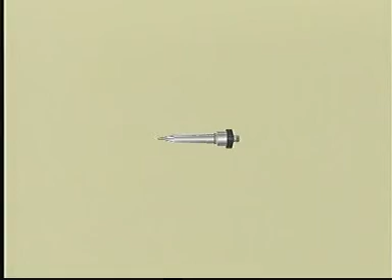Overhaul of fuel valves on 70, 80 and 90 MC engines. See Instruction Book, Volume 2, Procedure numbers 901 and 909.

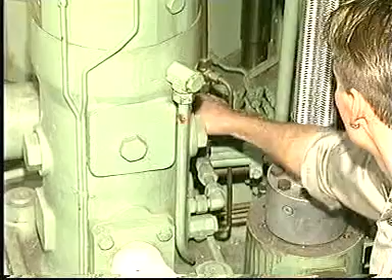Before any dismantling, drain the fuel oil from the fuel oil high pressure pipes. Using a hook spanner, loosen the union nut. Using a spanner, loosen the coupling pieces fitted on each end of the high pressure pipe.

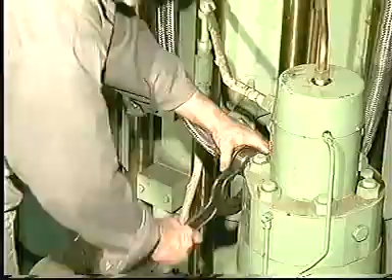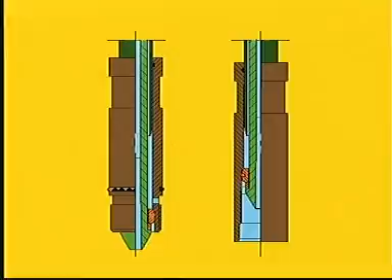The fuel oil high pressure pipes may also be of the double pipe design. See Instruction Book, Procedure numbers 901 and 909. Remove the high pressure pipe, taking care not to damage the high pressure pipe seatings. Disconnect the return oil pipe from the fuel valve.

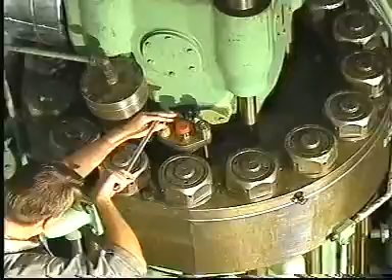Mount protective plastic plugs in or on all high pressure seatings. Unscrew the retaining nuts and remove the spring housings. Remove the fuel valve from the cylinder cover using the lifting tool if the valve sticks.

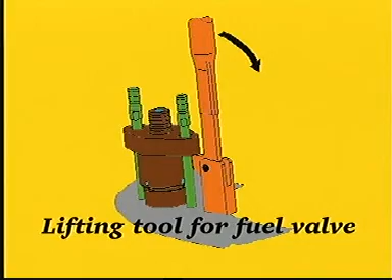Thoroughly clean the fuel valve bore in the cylinder cover. Clean off any carbon deposits in the fuel valve bore with a carbon cutter.

If marks are found on the seating in the bore, recondition the seating with a seating face cutter. Finally, grind the seating with a grinding mandrel and a grinding compound, for example carborundum number 200.

After milling and grinding, thoroughly clean the bore and seating and check again that there are no signs of damage on the seating.

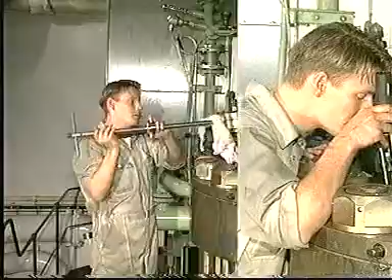After reconditioning the seating in the bore and thoroughly cleaning both bore and seating, fit new O-rings on a new or overhauled fuel valve which has just been pressure tested and lubricate with molybdenum disulfide. Carefully mount the valve in the cylinder cover.

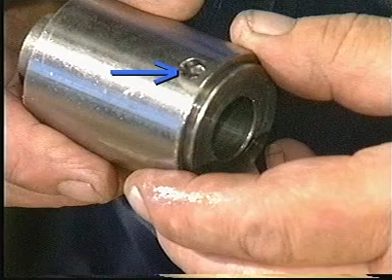To ensure that over-tightening has not taken place, check that the locking and indicating pins have not been bent or broken off.

In the event of over-tightening, mount a new spring housing. We recommend that the calibration of new and especially old spring housings be checked before they are mounted on the engine or on the fuel valve test rig.

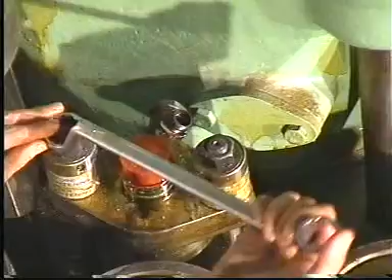Mount the spring housings and retaining nuts. Tighten the nuts until the top face of the pressure disc is flush with the top face of the spring housing.

Reconnect the return oil pipe to the fuel valve.

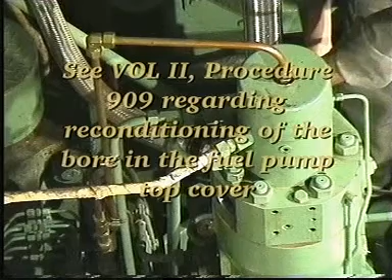Check that there are no marks on the seating surfaces of the fuel oil high pressure pipe. If necessary, recondition the seatings as described in procedure number 909.

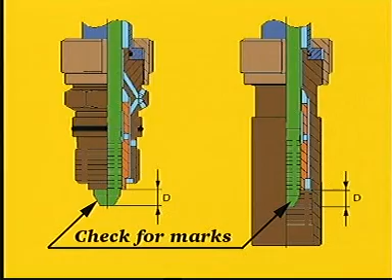On fuel oil high pressure pipes which are provided with a steel armoured protective hose, also check distance D, that is between the thrust bushing and the pipe end. See procedure number 909.

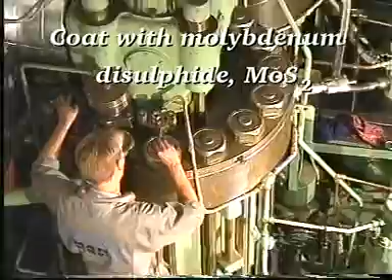Replace the O-rings and coat with molybdenum disulfide. Mount the fuel oil high pressure pipe.

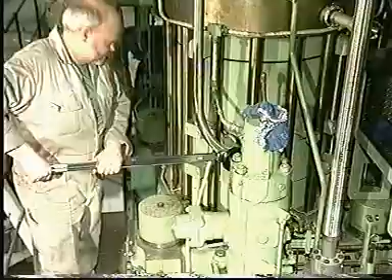Adjust the torque spanner to the value indicated in procedure number 901. Tighten the coupling pieces using the torque spanner. Using the hook spanner, tighten the union nut.

Close the fuel oil drain valve. Turn on the fuel oil supply.

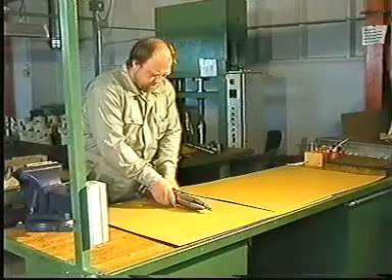Remove the sealing rings and the plastic plugs. Set up the fuel valve in a bench vise provided with soft jaws.

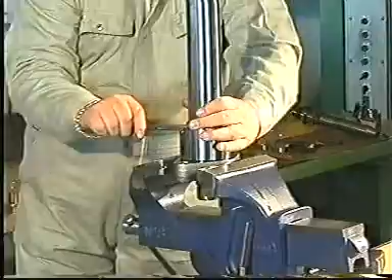Start disassembling the fuel valve by screwing off the union nut with a hook spanner. When overhauling fuel valves, handle all parts with the utmost care and keep them completely clean.

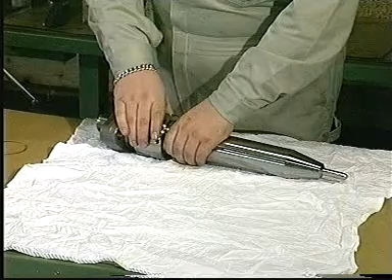Slide the valve head clear of the valve housing.

Remove the non-return valve, thrust spindle and thrust foot from the valve housing.

Loosen the spindle guide with a soft hammer and remove the spindle guide and nozzle.

Remove and discard all sealing rings. Clean all parts in gas oil and blow clean with compressed air.

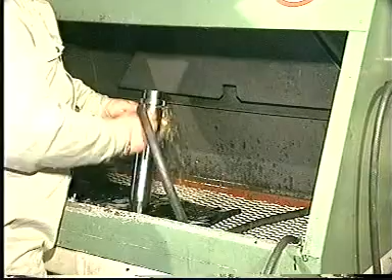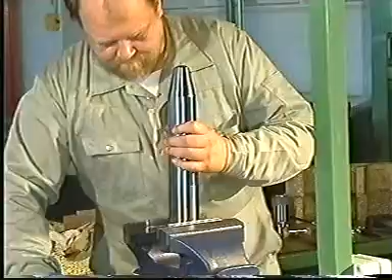Carefully clean and examine the parts and, if necessary, grind the seating surfaces with a grinding mandrel and carborundum number 500.

Use the milling or grinding tool if more serious damage has occurred on the seating surface for the high pressure pipe in the valve head.

Use the milling tool if more serious damage has occurred on the seating surface for the high pressure pipe in the valve head. The diameter of the seating surface must not exceed the value stated in procedure number 909 in volume 2 of the instruction book.

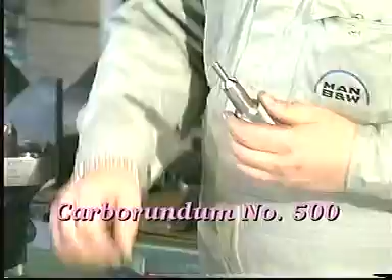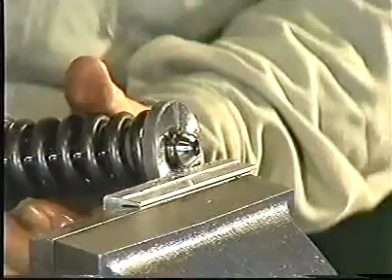Set up the thrust spindle in a bench vise with soft jaws. Compress the spring for the thrust spindle to remove the tension on the circlips and then remove the circlips.

Carefully clean and examine the parts and, if necessary, grind the seating surfaces with a grinding mandrel and carborundum number 500.

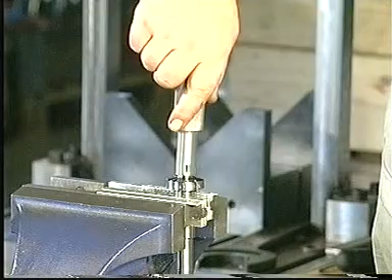Remove the sealing ring from the spindle guide. Disassemble the spindle guide with a brass mandrel and a hammer.

Use the special drills to clean off any carbon deposits in the central bore of the fuel valve nozzle or in the spray holes.

Test the spray holes with a test pin. If the test pin can be inserted into any one of the holes, or if the holes have become oval, the fuel nozzle must be discarded.

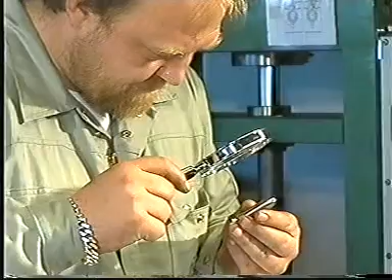Examine all seating surfaces of the non-return valve and spindle guide through a magnifying glass with 8 to 10 times magnification. If there are pressing-in marks or the like on the seats, mount a new non-return valve or a new spindle guide. Lapping of the internal seatings is not acceptable.

Defective parts, with the exception of the spring, cannot be replaced individually.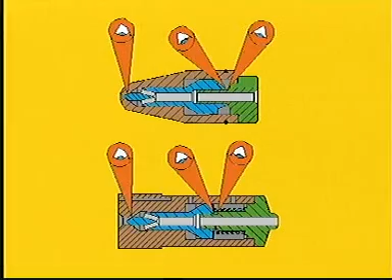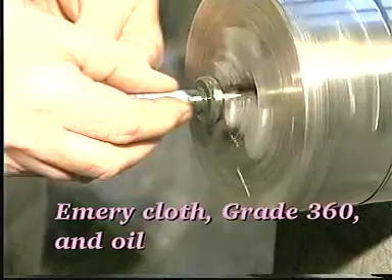Remove any deposits on the sliding surfaces with a grade 360 emery cloth and oil. Lubricate all movable parts with molybdenum disulfide.

Loosely assemble the non-return valve and the spindle guide.

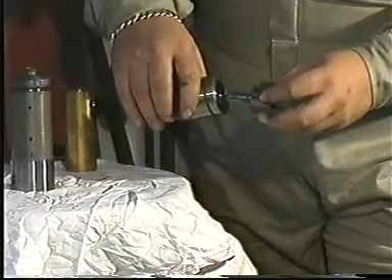Make sure that the parts are perfectly aligned and position the special tool. Fit the parts firmly together by pressing down on the drilling machine handle.

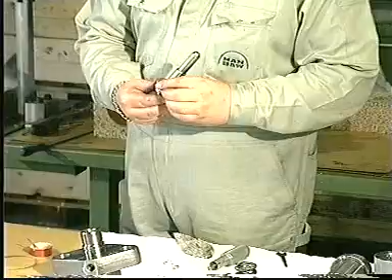Starting with any additional discs, assemble the thrust spindle. Slightly compress the thrust spring and mount the circlips.

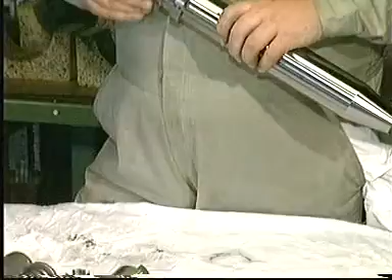Mount the fuel nozzle in the valve housing, making sure that it engages correctly with the guide pin.

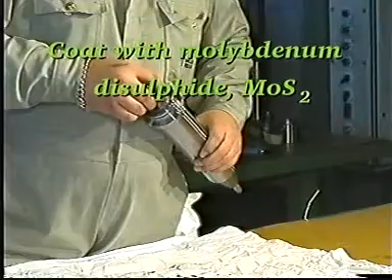Mount a new sealing ring on the spindle guide. Coat with molybdenum disulfide and mount the spindle guide, thrust foot, and thrust spindle with the circlips facing the spindle guide, and the non-return valve.

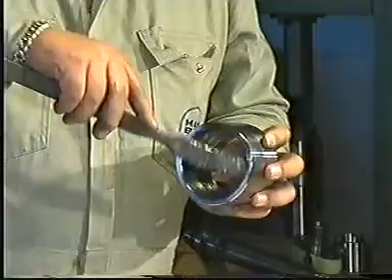Mount a new sealing ring in the sealing ring groove. Mount the valve head, ensuring that the guide pin between the valve housing and valve head is correctly engaged so that it will prevent the parts from turning in relation to each other. Mount the union nut and tighten it with a hook spanner.

Mount new sealing rings on the valve head and valve housing and mount protective plastic plugs.

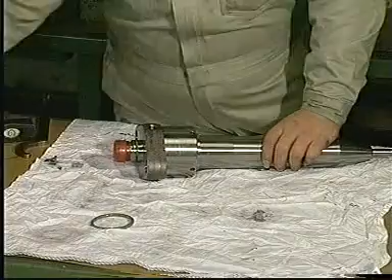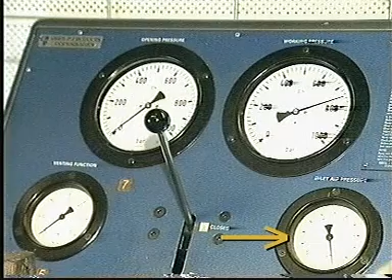Overhauled fuel valves, or fuel valves taken from stock, must be function tested before they are mounted in the cylinder cover. The pressure testing pump is equipped with pressure gauges for displaying opening pressure, working pressure, venting function, and air inlet pressure.

Position the fuel valve in the test rig. For guidance on how to operate the pressure testing pump, refer to the supplier's special instructions.

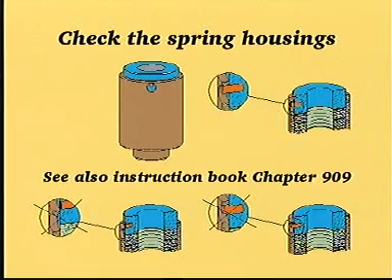To ensure that over-tightening has not taken place, check that the locking and indicating pins have not been bent or broken off. In the event of over-tightening, mount a new spring housing.

A very important element in the correct functioning of the fuel valve, both during testing and in service, is ensuring that the spring housings apply the predetermined tightening force.

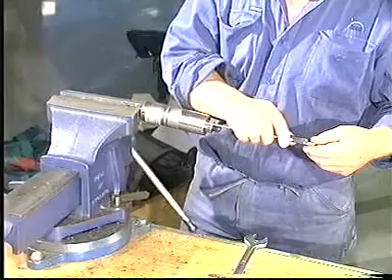To ensure that this force is present, a special tool has been designed to check the calibration of the spring housings. We recommend that the calibration of new and especially old spring housings be checked before they are mounted on the engine or on the fuel valve test rig.

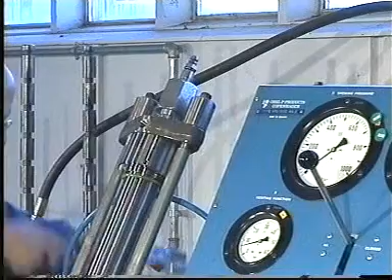Tighten the nuts until the top face of the pressure disc is flush with the top face of the spring housing.

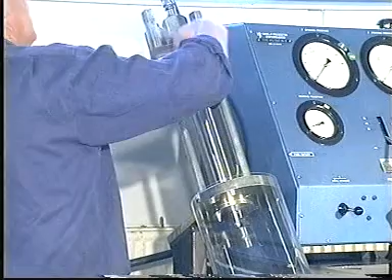Connect the pressure testing pump and the return oil pipe to the fuel valve. Slowly fill the valve by pumping at low pressure until oil, without air bubbles, flows from the return oil pipe.

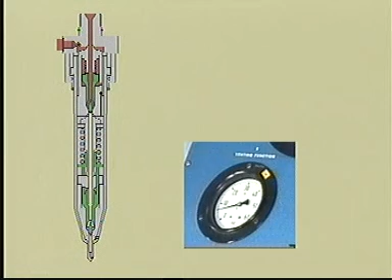Raise the pressure until it is above the opening pressure.

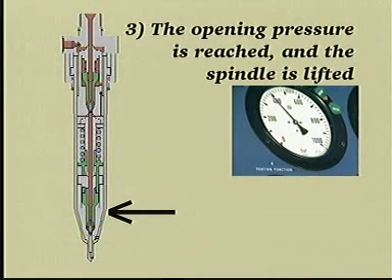Flush the valve for about 5 seconds.

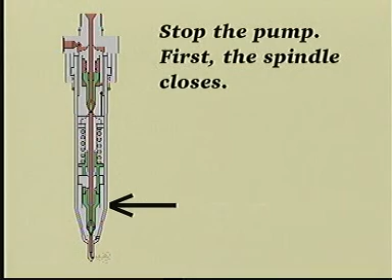Slowly increase the pressure until it is about 50 bar below the specified opening pressure. See Instruction Book, Volume 2, Procedure number 909.

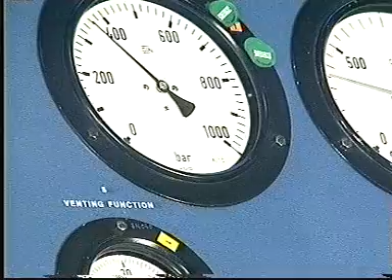There will always be a certain amount of oil flowing from the return oil pipe when the fuel valve is full of oil and pressurized.

Oil must not seep from the fuel valve nozzle holes until reaching a pressure of 50 bar below the specified opening pressure. If oil does seep from the fuel valve nozzles, see Procedure number 909. Lapping of the internal seatings is not acceptable.

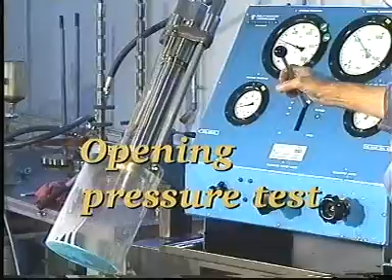Pump 5 to 10 strokes to fully open the valve and to blow out any dirt. Then relieve the pressure.

Slowly increase the pressure until oil is emitted from all the atomizer holes. Read the actual opening pressure on the pressure gauge marked opening pressure.

Compare the actual opening pressure with the pressure specified in Procedure number 909 and, if necessary, insert or remove discs or replace the spring.

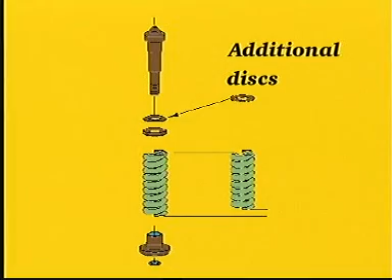Set up the thrust spindle in a bench vise with soft jaws. Compress the spring for the thrust spindle to remove the tension on the circlips and then remove the circlips.

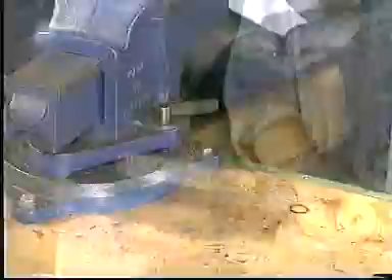Starting with any additional discs, assemble the thrust spindle. Do not insert more than 5 extra discs when adjusting the pressure.

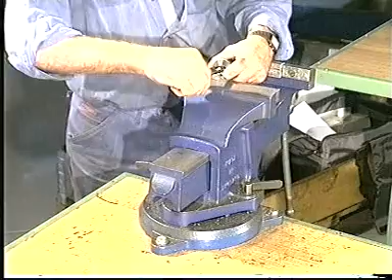Slightly compress the thrust spring and mount the circlips. The fuel valve must be retested after any adjustment.

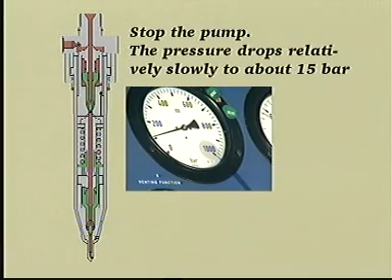If the quick pressure drop cannot be registered, the slide is sticking or the hole is blocked. Disassemble and examine the parts, replace if necessary.

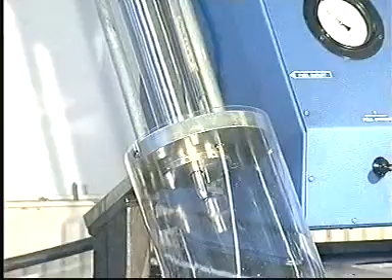Slowly fill the valve by pumping at low pressure until oil, without air bubbles, flows from the return oil pipe. Remove the return oil pipe and block the outlet hole with a gasket and a plug screw.